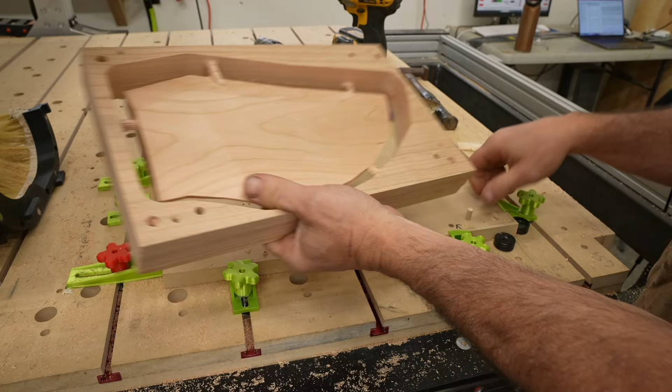Hey guys, my name's Corbin Dunn, and this is an Autodesk Fusion tutorial on how to set up tabs in a project specifically for CNC woodworking. This is specifically for when you want to do 3D tabs, which are required when you want to hold a shape in the middle and machine completely around it, or potentially do double-side carving on it. Okay, let's jump into Fusion 360.

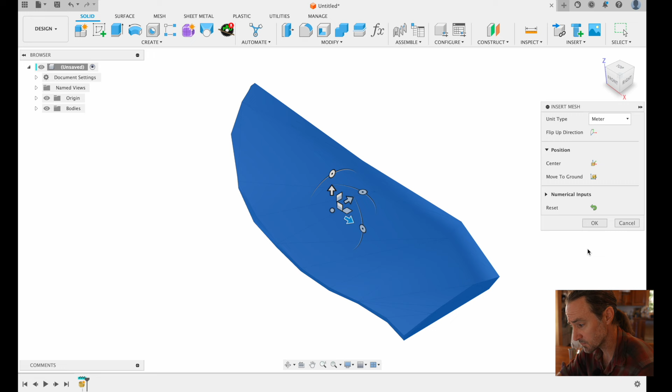So I have a new project, and it's in inches, because that's what I'm currently working in. Let's go ahead and insert a mesh, which is the thing that we're going to have to machine. And I'm going to do the wing tips. And this particular model, this STL, was exported as a meter format. So I'm going to import it as meters, even though I'm using inches. Let's go over and show the body. Right-click on the body, create components from bodies. So I have a nice component.

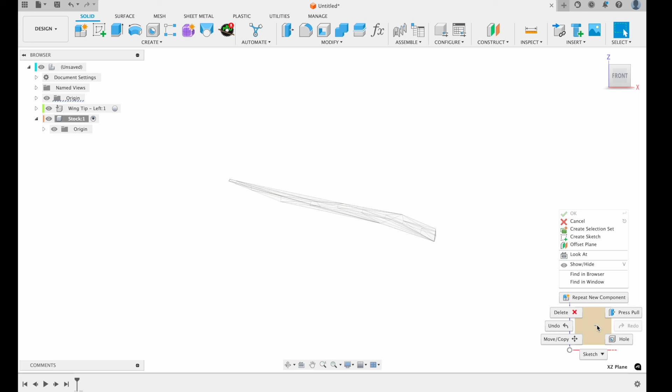Let's go to the front here, and let's go ahead and create a component for our stock. Creating a component for your stock is always nice, especially when you have a weird shape like this. Now I'm going to create, let's show the origin here. Right click on the XZ plane, create a sketch. Scroll over to our shape. Let's do the line command. And now I'm just going to start, oops, we don't want 3D sketch turned on. Yep. Let's create a line command.

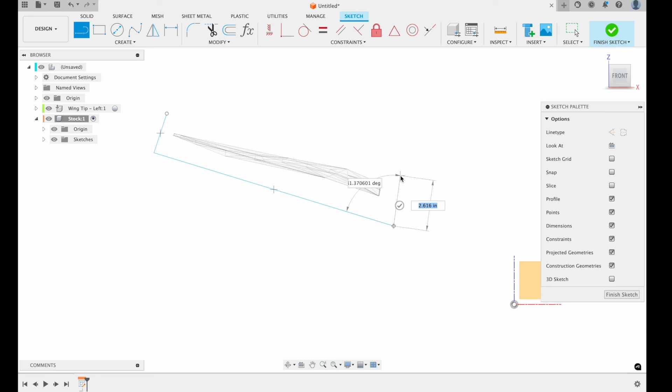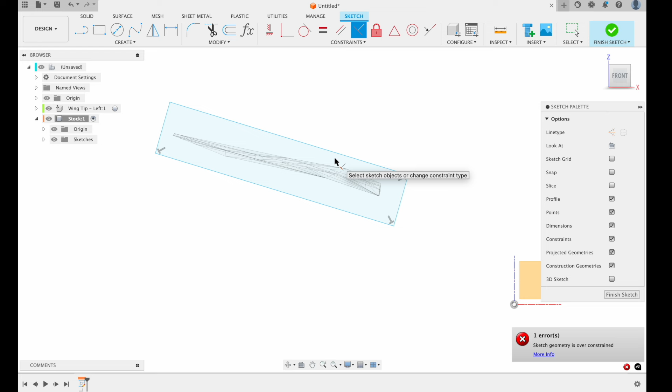Okay, so I'm just going to roughly draw a box for my stock around the shape. Having 90-degree corners is pretty nice too. Alright, let's connect these guys here. Let's make sure everything's square by creating some constraints. Perpendicular. And that guy perpendicular, over constrained, not a big deal. Let's start dimensioning things. So let's say the width of our stock is going to be 2.5 inches thick. We could probably get away with something thinner, 2.25, maybe even 2 inches.

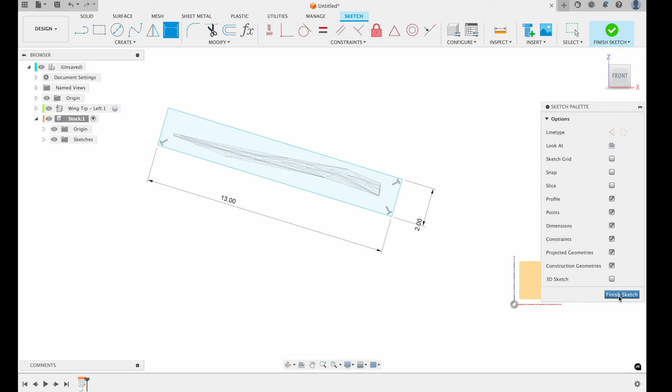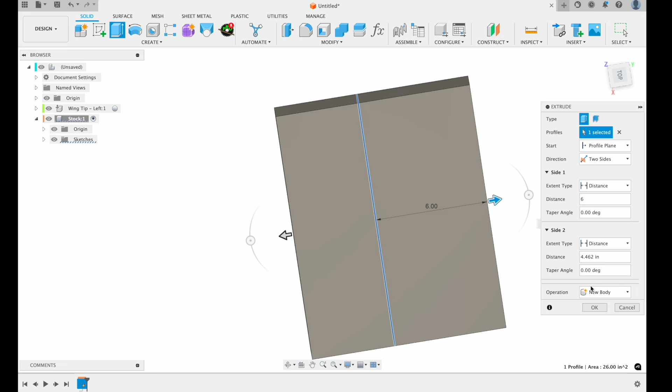Now let's get aligned around it. And usually I would also dimension the other side. Looks like about 13 inches would fit this particular piece, 13 by 2. Alright, so we can finish the sketch. And so now we can go ahead and extrude it. And let's go on both sides. And we're just going to have it cover up our project, maybe be a known size like 6 by 4.5. Alright, so this is our stock.

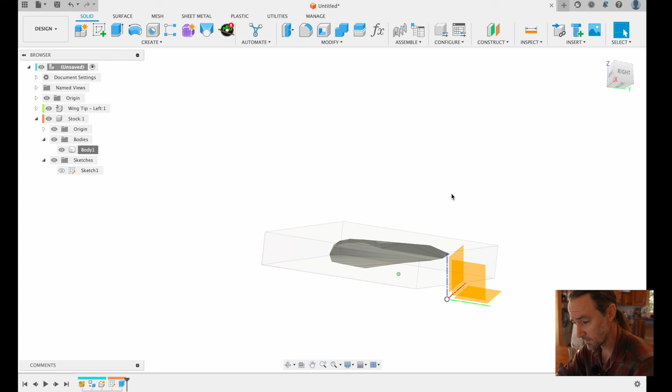Go back over to our top, and a lot of times I want to see what I'm doing. So for my stock body, I'll right click on it, change the opacity control to be something like 20 or 30%, and this way I can kind of see through my stock and have everything here to work with. Okay, inside my stock component, I'm going to activate that again, which is going to make it hide stuff to not see. If I activate it like this, we're going to create some tabs and move them around.

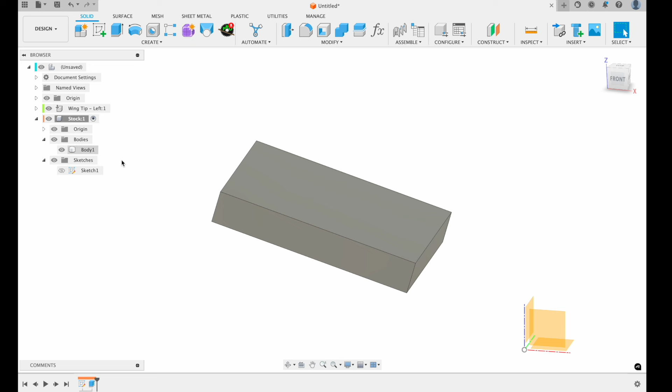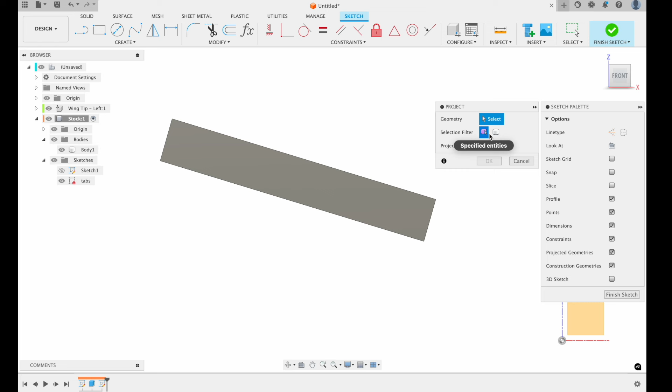So now I have my stock drawn, I'm going to right click on one of these faces and create a sketch. It's always important to name your stuff too, so we're going to call this tabs. Zoom back over here. I'm going to hide that body for this, but before I do it, let's do a project. I hit P, and I'm going to select the bodies, select this, hit OK, and now I can hide my body. Alright, so now we want to create some tabs, and really it's pretty easy. We just are going to create some shapes of the size of the tabs.

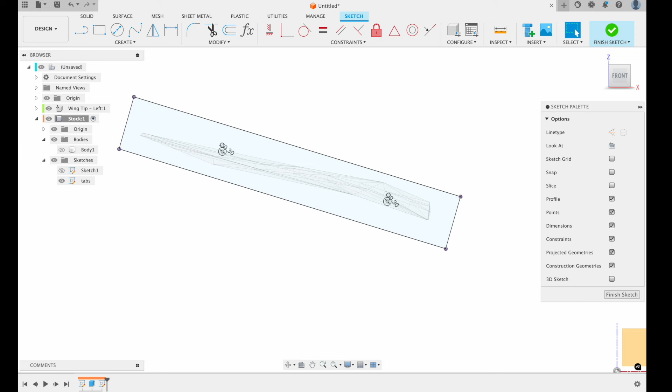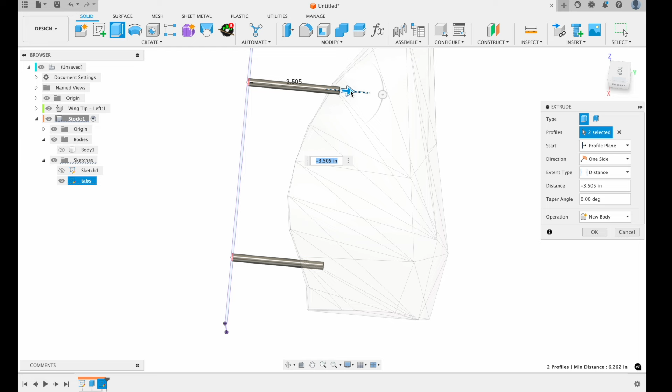Hit C for circle, and let's do 30 thousandths of an inch for a tab. I'm just going to create one here, and then one here, and then we can move them around pretty easily after we create them. Alright, so I'm scrolling a little bit here. Let's finish this, and let's extrude the tabs. Select these guys, and now here's our tabs. I'm going to make them pretty big, so they're going to go into our wing piece, into our model that we want to hold. And it should create 2 new bodies for the tabs.

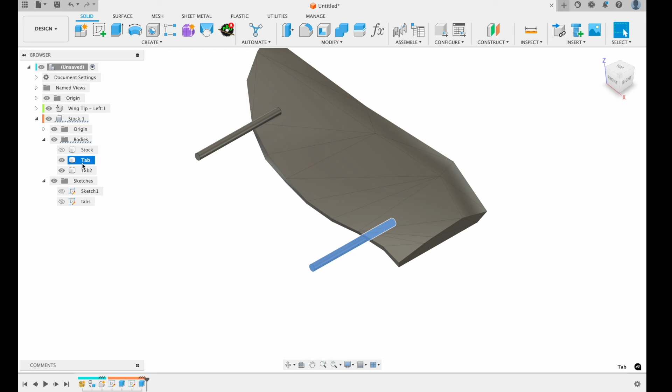So this should be, I'm going to rename these. This is going to be the stock. And this is the tab. Tab. Alright, so at this point, back to activating my main component. And let's unhide the stock, although it doesn't matter at this point. So now you just want to place your tabs so that they are in a good location. And in general, you want them to be at a transition between one plane to another.

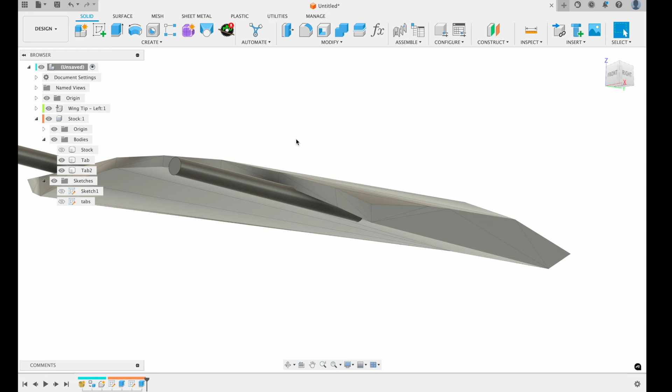So this tab here, I'm going to hide that stock. This one we probably want to go up a bit. So I'm going to hit the move component, M for move, and let's select our component. In fact, I'm going to, let's do, alright, select here. And now I can tweak the position of the tab a bit.

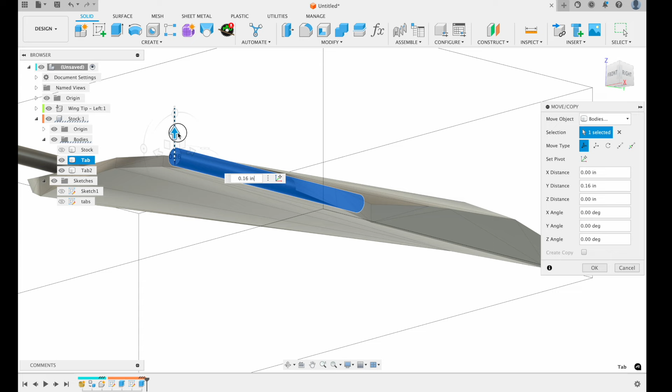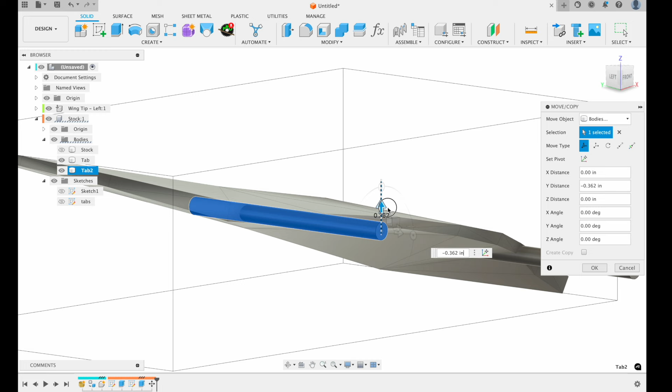So it looks like a pretty good spot for that tab. I'm going to hit OK. And let's take a look at this one. This one's a little bit higher, way too high. So hit M for move, select the guy I want to move, scroll it down, move it down. And you could also just rotate the angles. You could do whatever you want that makes it a better fit for your particular shape. This is one of the great, powerful things about this application.

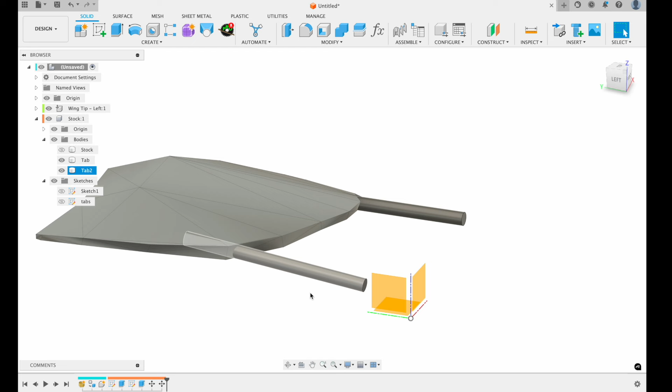Alright, I probably wouldn't want it sticking up here because that's going to cause some issues when we do some machining. So we'd want to shrink the tab or move it out. So let's just fix that right now. I'm going to take this guy, move it out a little bit more. Alright.

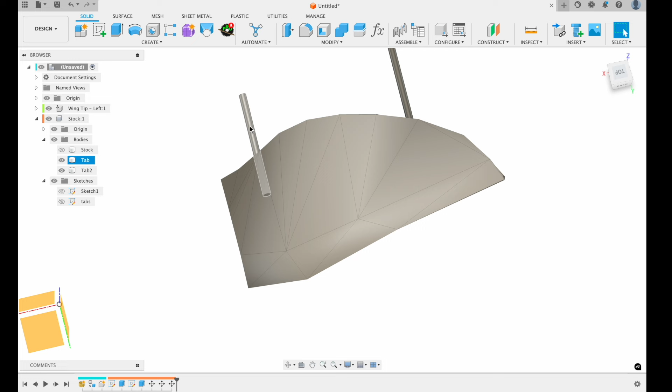So how many tabs do you want? You probably want at least 4. And tab direction and grain direction is probably pretty important. If my grain's running lengthwise on this wing piece, then these tabs would be pretty highly likely to break because it'd be a thin cross grain. So I probably want a tab on the other ends and the sides. For now, we're just going to go with these basic ones.

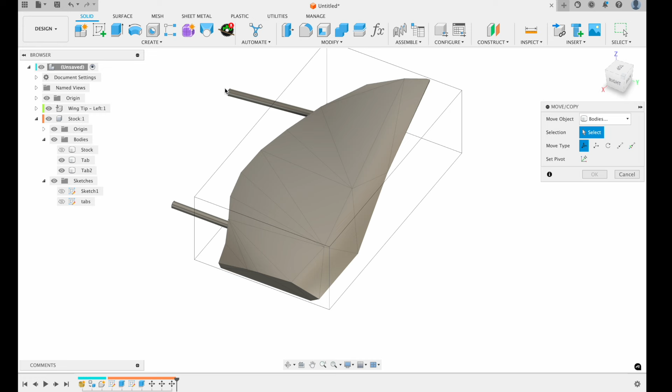So let's add 2 more tabs. And now that we already have some created, we can easily move them. So I'm going to select one, hit create a copy, and oops, before I do that, let's activate the stock component again. Hit move, select my body, create copy, and then create a copy over here. Okay, M for move, select my body, create copy, move it. Okay, and then now I can go over here and place these guys.

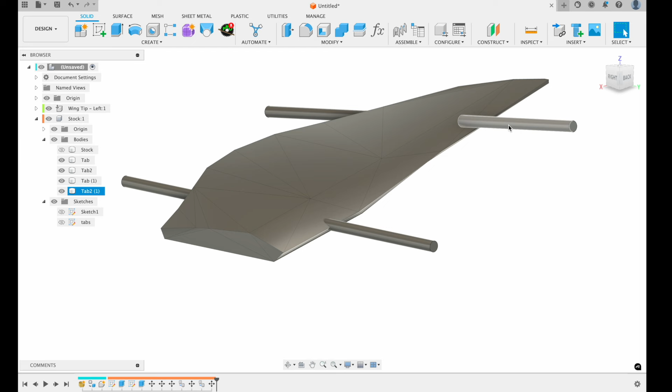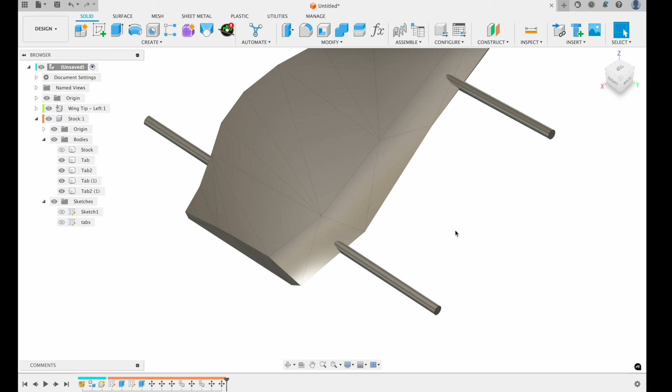And placing them is, like I said, a little bit easier when you can see everything. So this one's going to be at the intersection of both sides, which is probably okay, right there. This one needs to be a little bit lower, so I select it, move, and we don't want to move the faces, we want to move the body. That orientation is a little weird, let's try it again. There we go. Let's move it right like that. Okay. For the purposes of this exercise, we're just going to have 4 tabs.

Now let's take a look at the stock again. Do a top view. And the tabs go outside the stock, which probably isn't a big deal, but you can fix that. So you can just do a combine. So let's go ahead and fix that. So I hit combine, our target body is the tab. We're going to keep the tool. We're going to go to cut and use the stock as the cutter. And oops, I did it backwards.

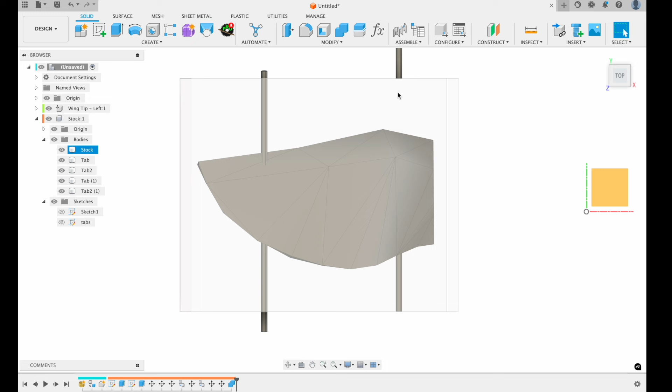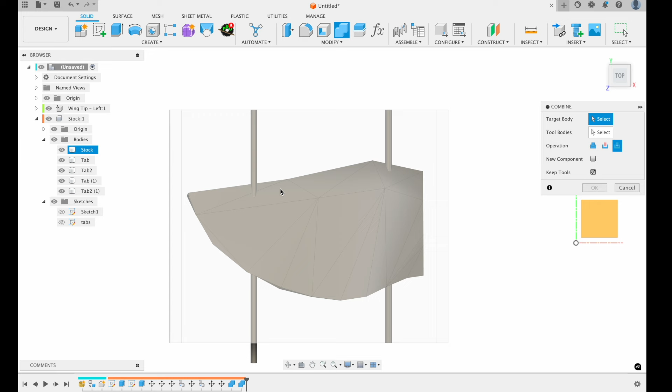Undo. Let's go to combine, target body is the tab. We want to do an intersect, where the 2 intersect. Keep tools, intersect with this. There we go. Combine, select this guy, select the tool. Okay, combine, tab, body. Okay. And alright.

So that's the basics on creating a few tabs. I'd probably angle this one here in this front a little bit better so it's not showing up on my piece and leaving something I have to sand off, or shrink it. You could easily resize it.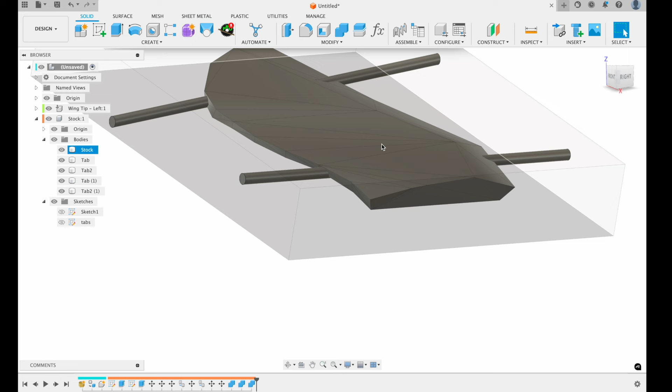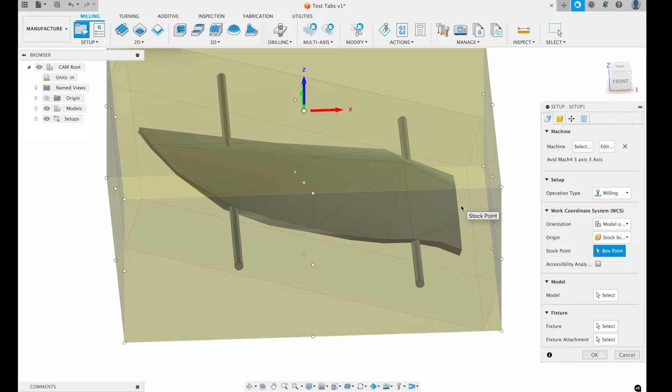Okay, so now for machining. Let's give this some name, test tabs. Just saving the project. We're going to go over to the manufacture workspace and let's create a new setup. Hit the setup button. I'm going to select my Avid CNC and that sets up the post processor. Alright, now the stock is huge, and so I'm going to go to the stock tab and go from solid, and I'm going to choose that stock I drew up.

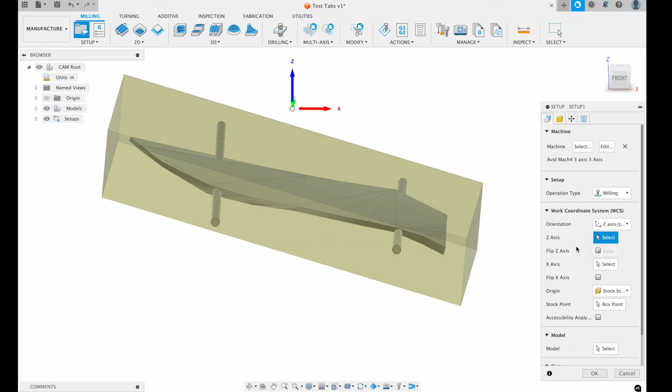Now the axis origin is really weird, so we have to fix that. So instead of model orientation, I'm going to select Z and X axis. And so I can select the Z axis on my stock that I drew up. And it just flipped it upside down, so we want to flip it right side up. And let's select the X axis. Let's make that guy X. Let's set the origin point to be here. And so that's the bottom left of our stock.

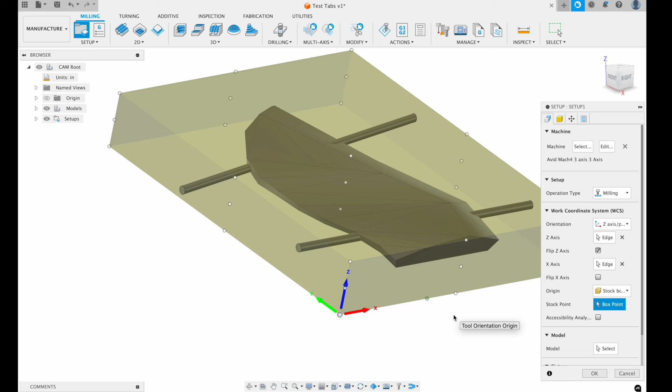All right. Other things that I would normally do at this point is I would give my setup stuff for post-processing a name. So we could call this the top wing tabbed. And hit OK. Everything's selected. Let's ignore that warning.

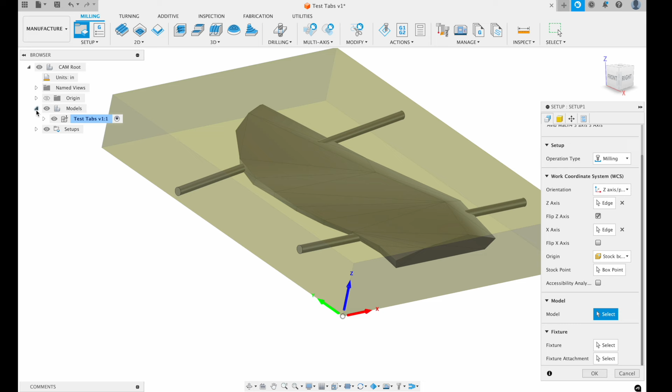Okay, so the other thing is for the model, we need to go ahead and select just the wingtip. All right. So while we're here, let's turn off the origin down there because we don't need to see that. All right. Okay, so we have our setup.

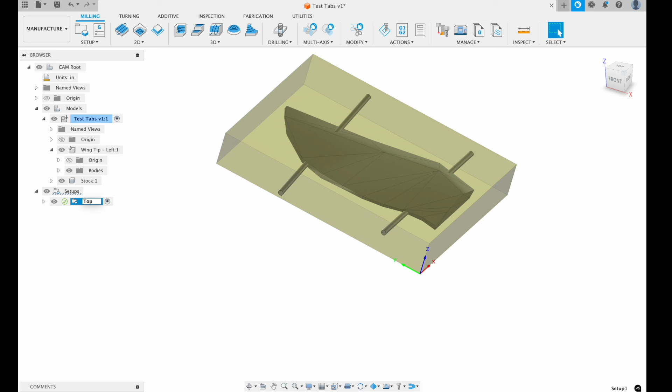Let's assume we would do two-side machining, so let's call this the top of the wing. With typical machining, you probably want to do a 3D pocket or 3D adaptive. Let's just choose 3D adaptive. Actually, let's do a different toolpath because that one's a little bit too slow. Let's do pocket clearing. 3D adaptive would be the same.

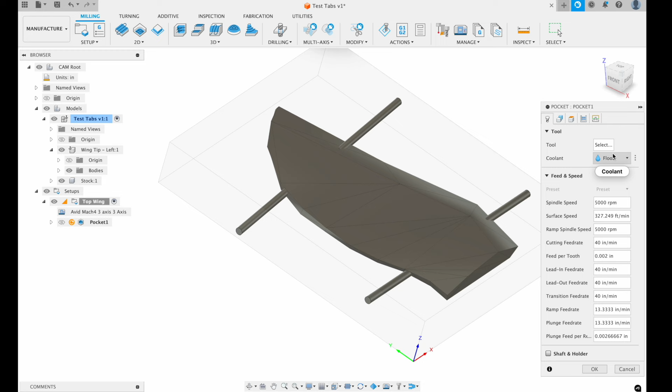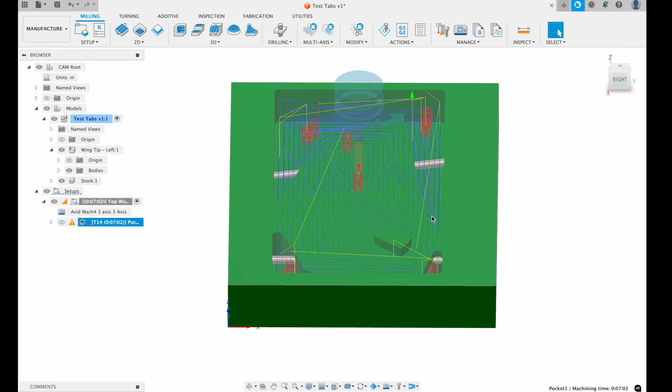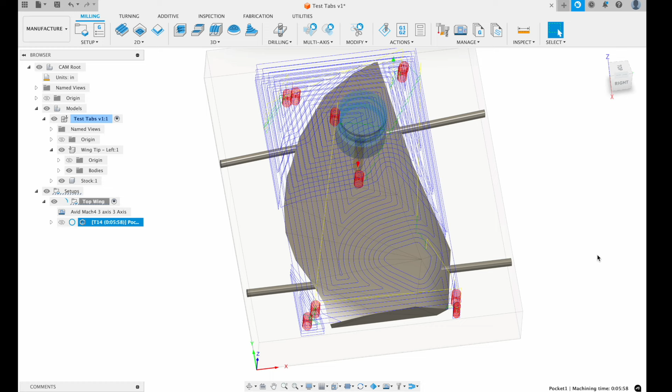So that's not good. It also didn't machine the entire stock away. We do want that to happen. Usually I like to machine everything away, and that's really because rest machining was checked. So if we uncheck rest machining, oh, I guess it wasn't that. It must be we can check stock contours. That's what we needed. Maybe, maybe not.

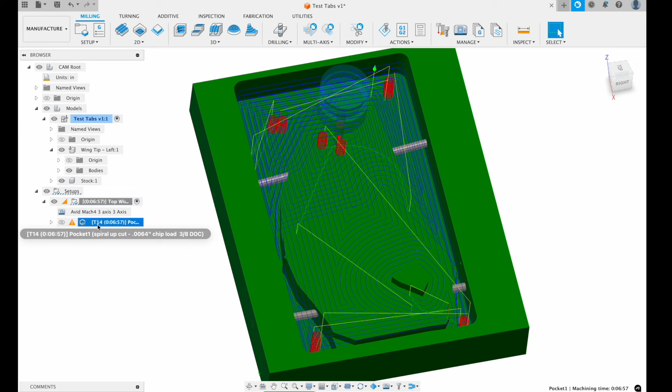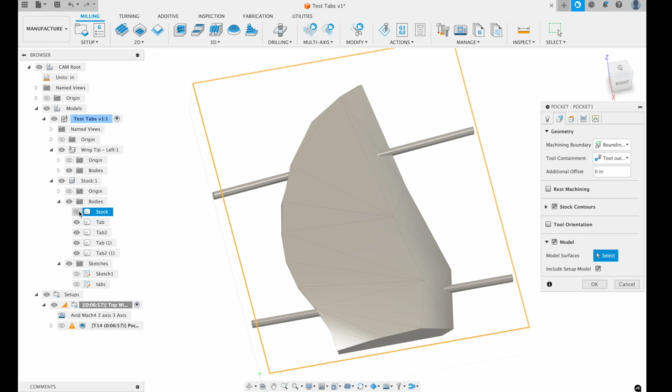All right, so here it's not doing quite what we want because it would machine the tabs away. So the first trick you have to do is go to your geometry section here and hit model. Then you can add some surfaces for it to assume is the model. Right here it's wanting to select the stock, so I'm going to hide my stock. Oops, stock also has the tabs. Hide the stock body. So I'm going to select my tabs to be part of the model

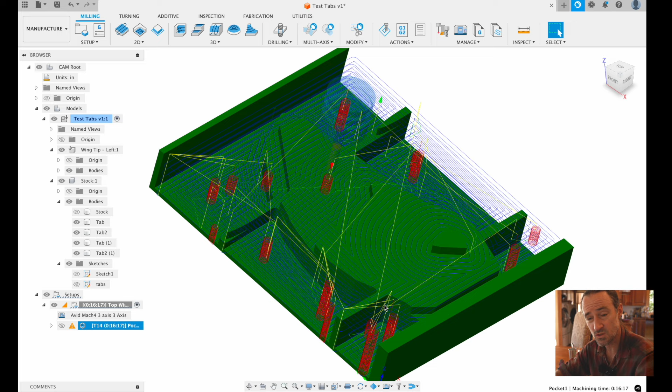and hit OK. So what this does is it will machine everything away but leave the tabs. Now this isn't really what we want, because if it machines away the sides of the tabs, it will just fall apart. So you want to limit where it's going to machine. And the only way to really do that I've figured out is go back to design, and we have to create a limit area.

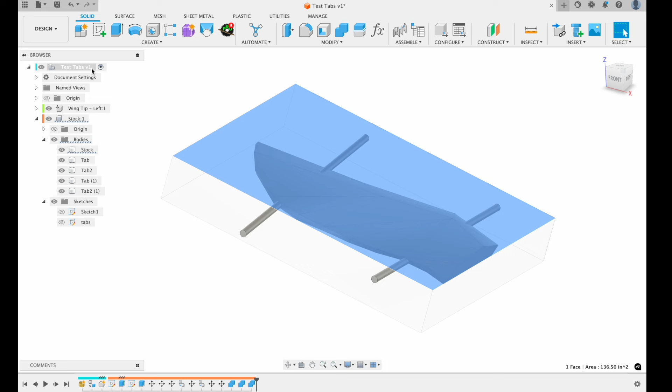So I'm going to go back to my stock, and we have the main component active. Doesn't really matter too much. We create a sketch on the top of the stock, and we want to create an outline around the shape we're machining, in this case the wing. I can't select the wing because it's a 3D mesh. The way I work around this is I would manually draw a vector around the wing.

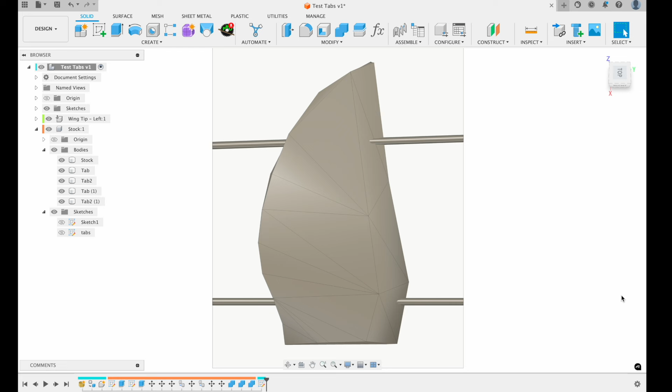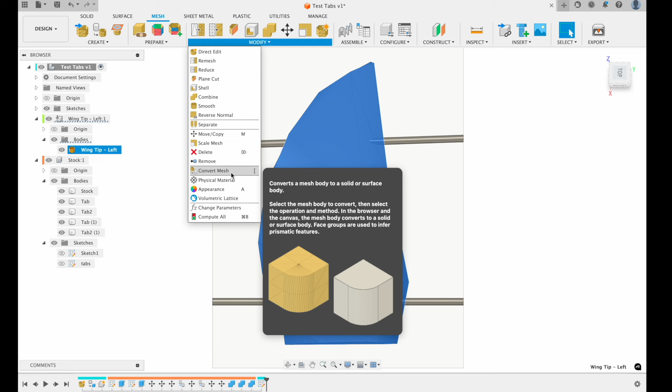That's one way. But I also know that this mesh is pretty low poly, so I can go to the wingtip mesh, and, well, maybe not right click, we can select the mesh, go to mesh, modify, and do a convert mesh. So it's going to take that mesh body and convert it to be an actual regular shape inside of Fusion. Now this won't work if your mesh is complex. This is a very simple mesh.

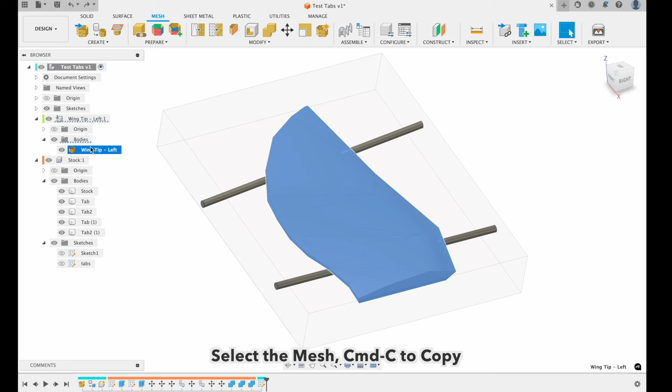I also want to leave the original mesh for machining, so I'm going to undo. I'm going to copy this, paste it here, and on this one I'm going to do convert mesh. Okay, so I have a copy of the wing that's now an actual solid object in Fusion. Now I want this sketch that I added to be the limits, but it's in the wrong area in the timeline now. There's a few ways to fix it. I could move it down to the stock. That didn't work. We're just going to delete it. We don't need it. We'll do it again.

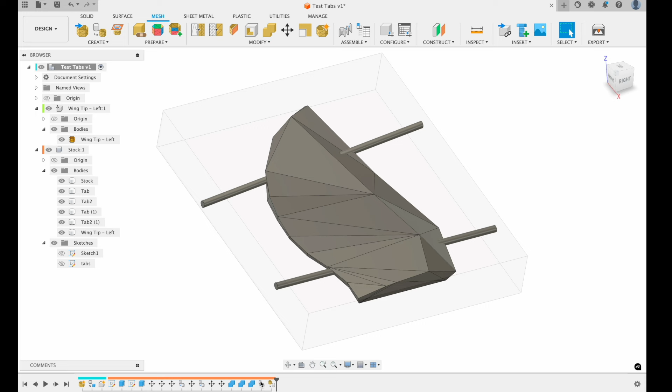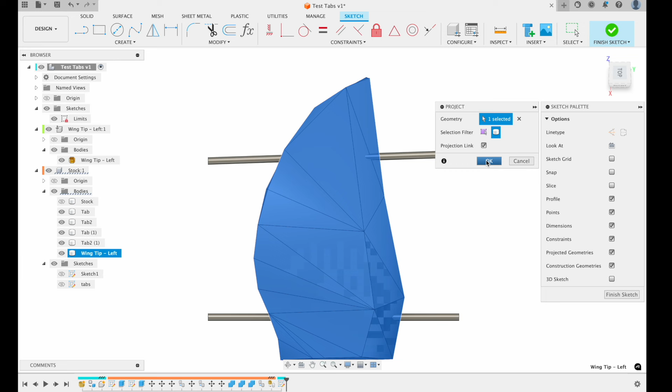Right click on the top of the stock, create sketch again. We're going to call this sketch limits. Now I can hit P for project, and I'm going to select the wingtip, and projection link is optional. And so now if we hide all the bodies, we have the wingtip. We could offset it, which might be nice to have the limits, but we will just do that inside of Fusion in the toolpaths.

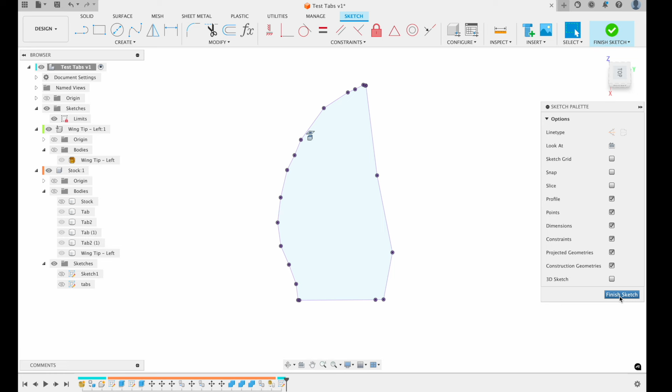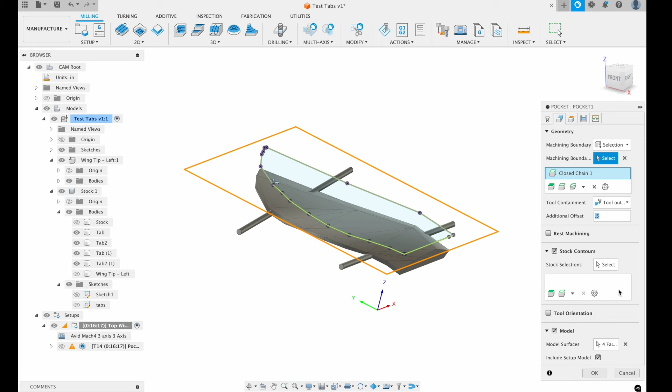Right. Now we can go back over to manufacture, turn back on some bodies, hide this wingtip one, show our wing. Now if we go back to this toolpath, we can set the machining boundary to be a selection, and the machining boundary is going to be this selection here. We want the tool to go outside the boundary, probably by the thickness of the bit at least. We could even go a little bit more, so let's go to 1/2 inch outside, and then hit OK.

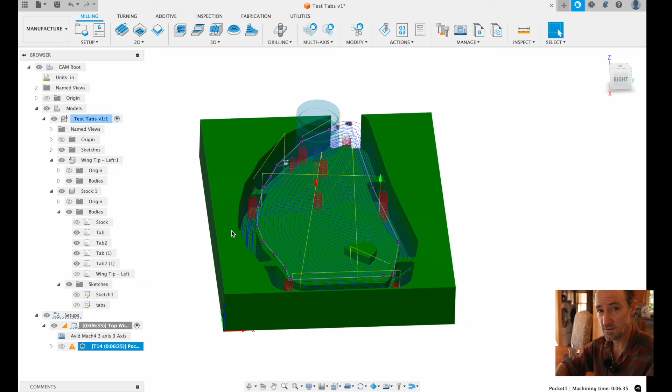And so now, after it generates the preview, we see it's actually machining around the tabs and leaving them intact. That was the key thing, the most important thing: machining boundary limitation and selecting the additional model parts to machine. This is applicable for a pocket toolpath and also for 3D adaptive clearing toolpaths.

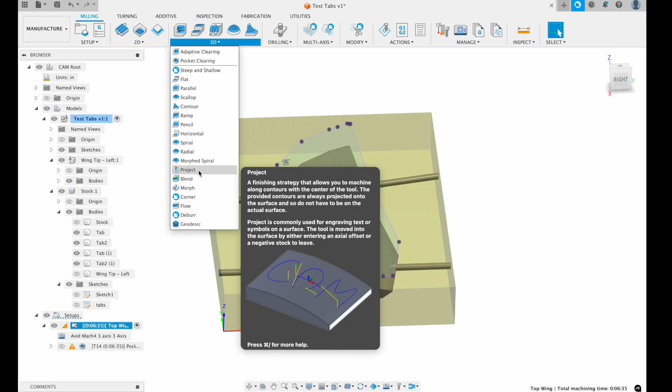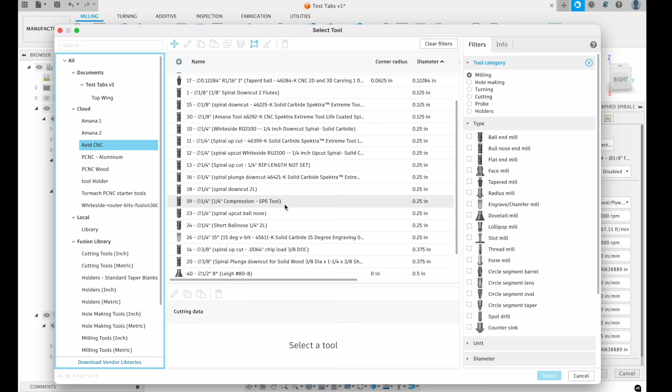Now for a finishing toolpath, it's slightly different. So let's say that now we want to do a 3D morphed spiral. It's something I like. And in general, I like to use ball nose bits. So let's do a ball nose bit. Let's see here, like a 1/4 inch ball nose, I think is what I actually used for this project. And overall length, ball end mill right here. Okay, here's a 1/4 inch ball nose.

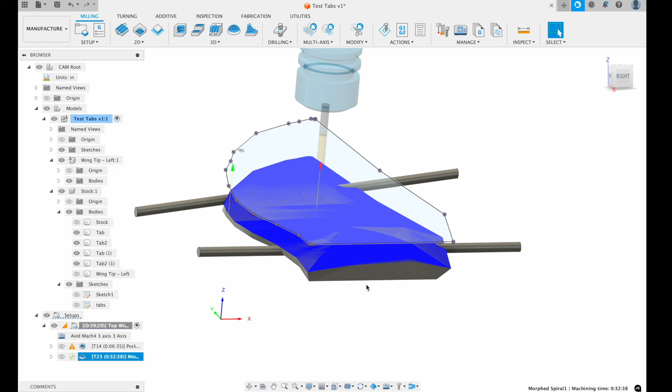So like before, if we just hit OK and let a toolpath generate, we can see what happens. And I already know what's going to happen, which I can kind of see in the toolpaths. It's going to actually machine and cut away these tabs. And it's still generating the stock. Let's give it a minute. And while it's doing that, I'm going to go ahead and hide that sketch for the top. Right here, the limit sketch we don't need to see anymore. All right.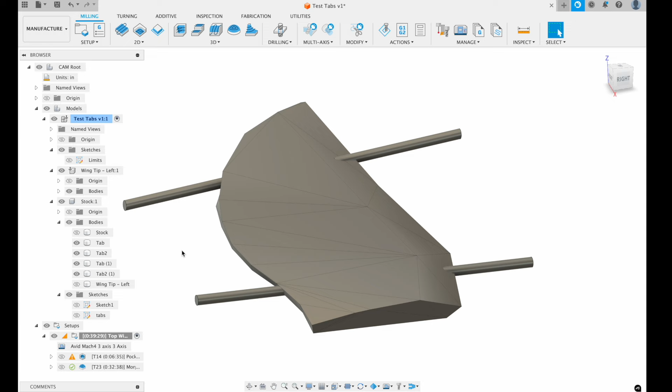So this 3D morphed spiral, it's hard to tell, but what you see right here is this silver part, which means it would cut the tab away. And it would be more obvious if it was actually on the back side because the tabs would just be completely disappeared. So we need to fix that so it doesn't actually cut that away.

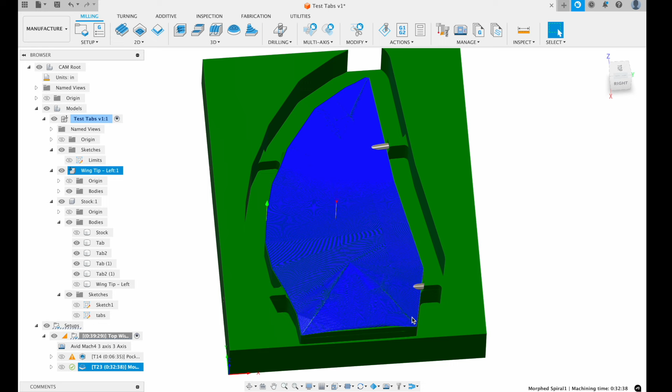And the way to fix it is going to be even easier. Double click on it to bring it up. And avoid machine surfaces. This is something that I wish the Pocket Toolpath had, because this is really all we want. We want to just avoid the tabs. And hit OK. And that is it. That will get you a finishing toolpath where they avoid the tabs.

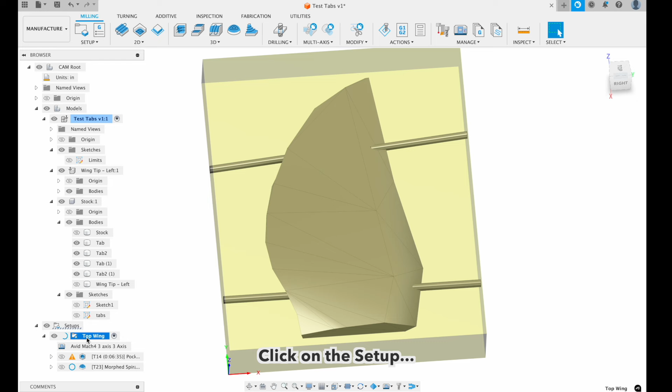And while that's generating, I'm going to go ahead and copy the setup, paste it here, and we're going to create a new setup for the wing bottom to show how I would do the bottom side. Looks like the toolpath finished generating, and as you can see, it's got a lot of lifts around the tab, which is perfect. That's what we want.

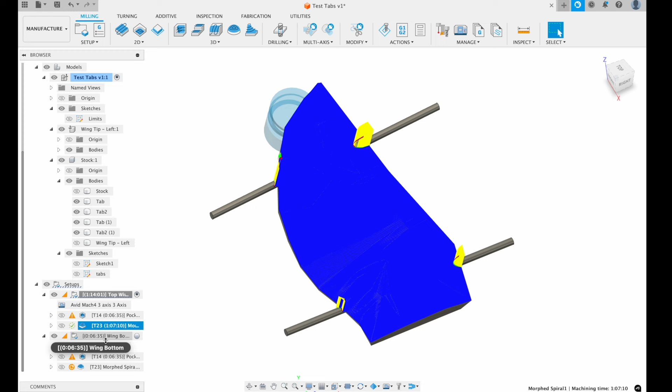Alright, so let's start the bottom. I'm going to select and activate the bottom. So I copied this toolpath from the top portion. So we want to change a few things. We're going to go stock, and we're going to do from preceding setup, continue rest machining. I'm going to go ahead and rename this bottom. The bottom of the wing is the program name.

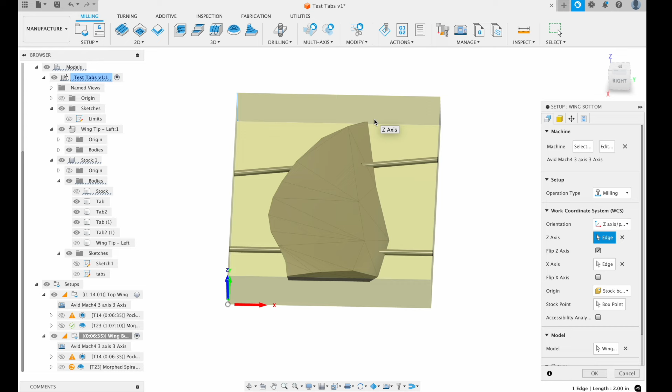And then we have to reset the orientation. So if this is the top, let's say we're going to flip our wing over like this. And we want this to be our origin here on the bottom. So I'm going to go and select this new origin, and now the Z needs to be flipped. So I check that, and now that's flipped and that's correct. And so I can hit OK.

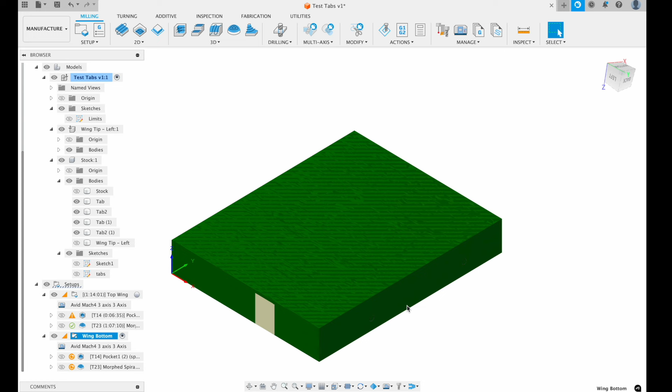And one of the nice things about Fusion is if you select and activate a particular setup, it will go into the orientation of the origin that I have here. So if I now want to go to the wing bottom, it flips it over, and unfortunately the stock is hiding it, but now it flipped it over correctly.

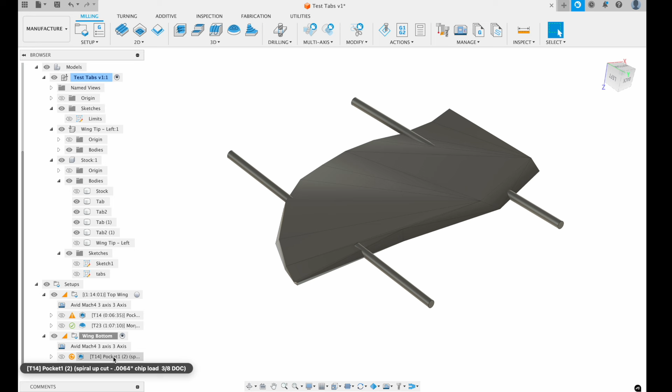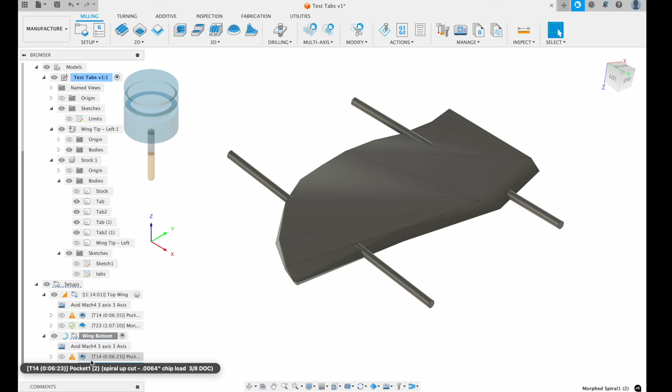So here we just do the same things. I'm going to double click on the pocket. It should have copied everything over, so we don't have to do anything different except hit OK. And same with the 3D morph toolpath. Double click it, hit OK. And one thing we could do on the pocket at this point is we could do rest machining if we wanted to, but I'm not going to because the computation is pretty slow.

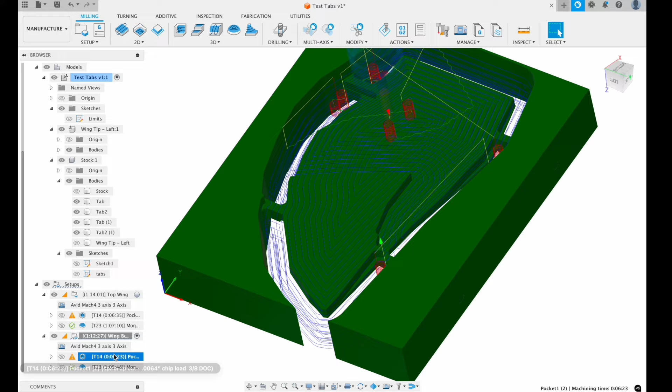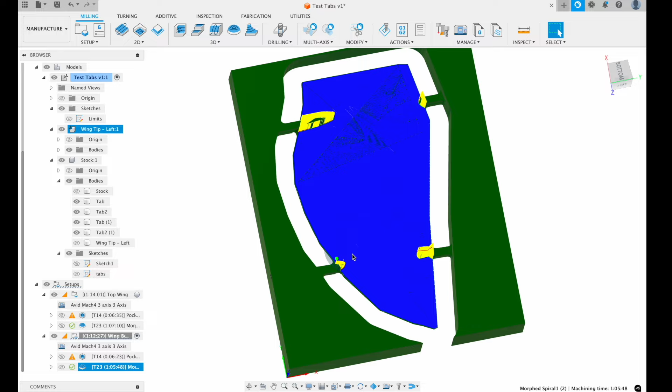Alright, but this gives a more clear example of when I select it. Here's the roughing toolpath, and from here you can see it's leaving the tabs. And let's go to the finishing toolpath. Still generating the stock. Let's let it go ahead and do the simulation to generate it. Alright, so the stock finished. And so here we can kind of see the toolpaths and what it does. Here's the top. And here's the bottom. And that's it.

So at this point, one of the things I would actually do is go ahead and run simulations in Fusion 360 to make sure I don't have any collisions. And then I would take a little bit closer look at the toolpaths, make sure they're going to cut the way I want with respect to the grain, make sure the feeds and speeds are correct because I kind of just randomly selected something. And that's pretty much the basics. That's how I do 3D tabs in Fusion 360.